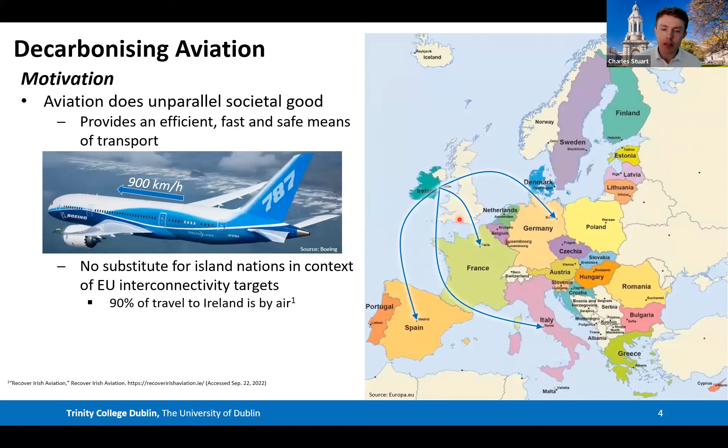The other bit of context is that in Ireland we are an island nation, somewhat geographically divorced from the rest of Europe. Europe doesn't just have emissions targets, it also has quite stringent mobility targets, one of which says you should be able to move door to door anywhere in Europe within 4 hours. So for us, aviation is quite important - there aren't really many alternatives. That's borne out in the fact that 90% of travel to Ireland at the moment is already by air.

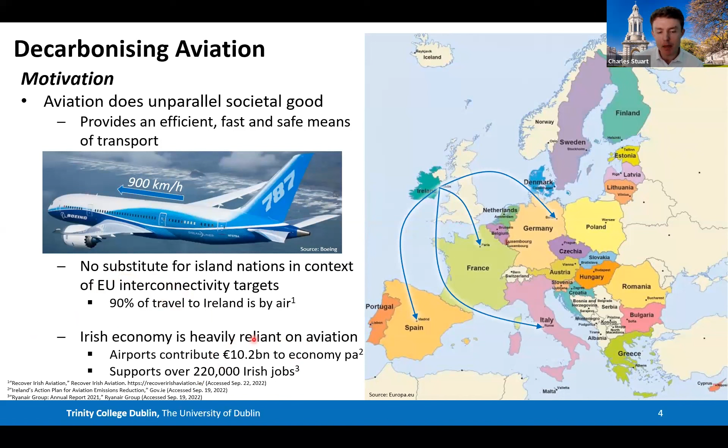The other thing to be aware of is that the Irish economy is very heavily reliant on aviation. There's about a €10 billion contribution to the Irish economy per annum from airports, and in and around 220,000 Irish jobs that hang upon a strong and sustainable aviation sector. So clearly aviation is very important for Ireland.

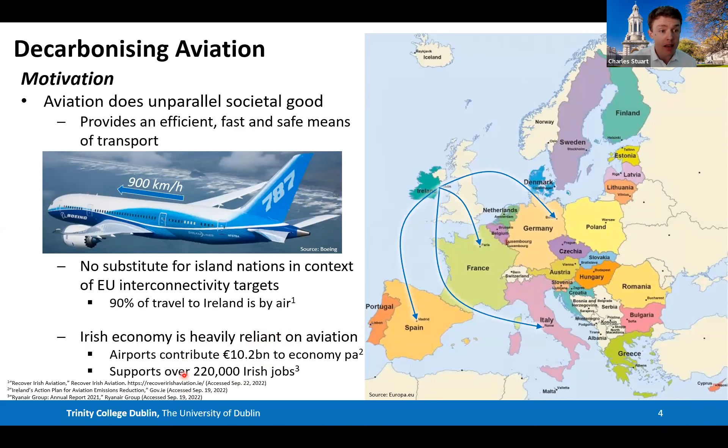The flip side of that coin is that Ireland is also very important for aviation. We punch well above our weight in terms of influence in the global aviation business. 14 out of the 15 largest aircraft leasing companies are based in the Republic of Ireland, and in total there's in and around €100 billion worth of assets - aircraft and engines - managed through Ireland.

The other bit of perspective is that Ireland is home to Europe's largest airline, Ryanair. And from a bit of a Trinity-centric viewpoint, the CEO of Ryanair, Michael O'Leary, is ex-Trinity. CEO of Qantas, Alan Joyce, ex-Trinity. And the ex-Director General of IATA, Willie Walsh, is ex-Trinity. So without revolving in these circles you may not be aware of it, but Ireland is a key player in the global aviation business.

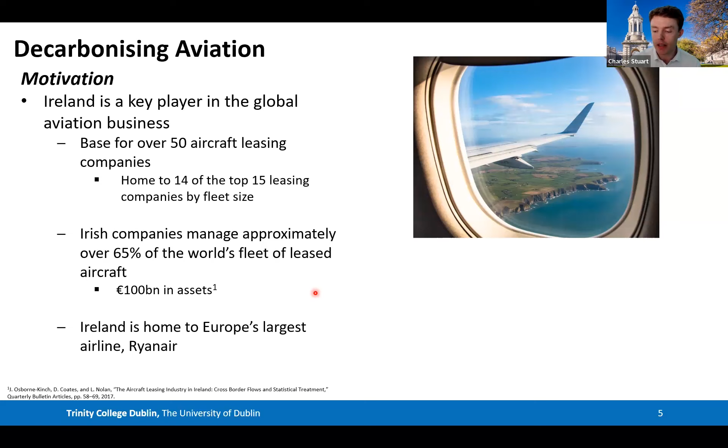What this all means is that as we stare down the barrel of quite a significant transition in the sector, it's clearly very important that Ireland has a strong voice within the European sustainable aviation community. Aviation in some ways is more important for us than any of the other European states. As we transition towards a low carbon future for aviation, it's very important that the technology agenda followed reflects Ireland's needs, and a lot of that comes down to the policy side as well.

Now the flip side of that coin is something we're all acutely aware of - the environmental impact of aviation can't be ignored. At the moment the global aviation sector contributes about 2 to 3%, depending on who you listen to, towards global CO2 emissions. The challenge is that even if nothing changed, that percentage would increase over time because other sectors are able to decarbonize more easily and are doing so more rapidly. This is a particular issue the aviation sector has to grapple with.

The source of these carbon emissions is that it's a sector almost entirely reliant upon fossil fuels. I'm not going to turn this into a combustion lecture, but this is a quick illustration of the reaction between octane, a reasonably good surrogate for Jet A1 or aircraft fuel, combusting alongside oxygen. If you've got carbon in the fuel, you're going to have carbon dioxide in the exhaust gases - that's absolutely unavoidable. The conversion ratio is around 3.1 to 1, so we release 3.1 kilos of CO2 for every kilogram of jet fuel burned.

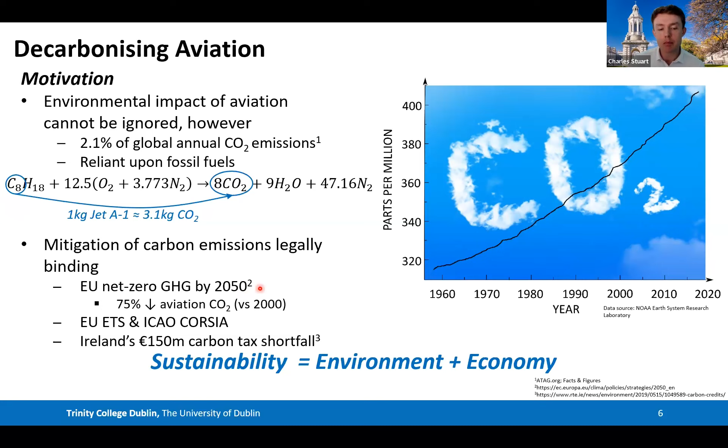What I've really been trying to communicate over the last couple of slides is that a truly sustainable solution for aviation is one where the environmental aspects are complied with and adhered to, but also the economy is allowed to prosper, so that the business side of aviation and all the positive aspects that it brings in terms of connectivity have to be maintained as well.

Now, in terms of the challenge then, as John mentioned, we've had a little bit of a perspective before on the road transport sector, but just as an overarching message for transportation, there's going to be no single solution to replace hydrocarbon fuels across the board.

So I've illustrated here a graph which shows energy density per unit volume on the y-axis and energy density per unit mass, or specific energy, on the x-axis. You can see that our traditional hydrocarbon fuels are a very good compromise for both of these. They're energy dense, they're also very easy to store, they're liquids at room temperature and pressure, and all things considered, they are remarkably inexpensive.

When you take the process of building an oil rig, floating it out into the ocean somewhere, drilling a few holes, you eventually hit oil, bringing the oil on board the rig, pumping it on shore, processing it, refining it, distributing it, putting it out to filling stations for the automotive case - that's all done for somewhere in the region of €1.60 a litre, and half of that's tax. So it's truly remarkable how inexpensive these are.

Another little bit of context is that we rely on carbon-based fuels. So cell respiration, which keeps us all going, uses glucose, which is a hydrocarbon effectively with a little bit of oxygen tacked onto the end. So it's a sugar.

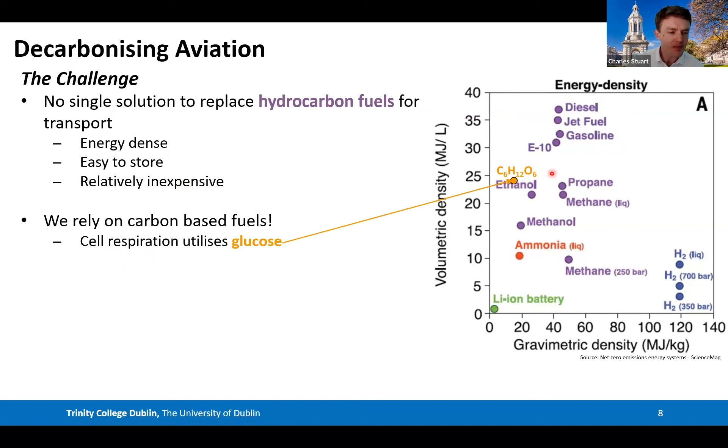And when we're talking about aviation, it's worth being aware that fat is a remarkable energy storage medium, and it's very, very close to jet fuel. That's no coincidence. If you look at some of the great migratory birds, such as the Arctic tern shown here, they can cover about 22,000 kilometers in 3 months. So what we ultimately see is that the aviation sector has converged on a fuel solution which is very similar to what millions of years of evolution have resulted in. That's just an illustration of how difficult it's going to be to move away from hydrocarbons in that context.

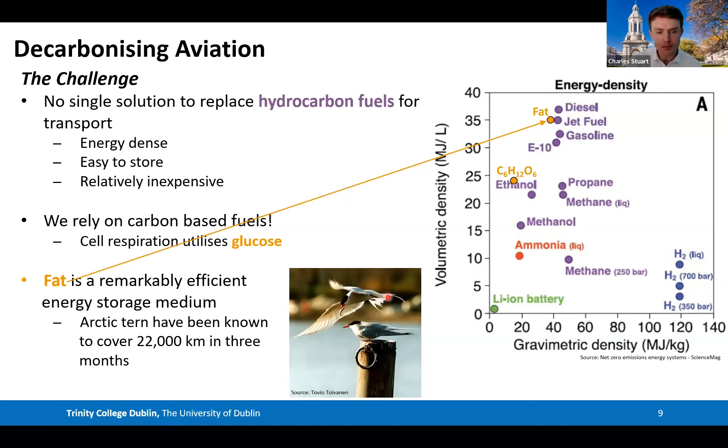Making it even more difficult is that aviation is going to be the most difficult sector of the lot, even within transport, to decarbonize in a 2050 timeframe. It is worth being aware that these are already very, very efficient machines.

If you look at the CO2 emissions per passenger kilometer for a Ryanair flight in 2021 and compare that to a typical internal combustion engine powered relatively small car, it's approaching half the CO2 emissions per passenger kilometer at typical utilization levels. And that's in spite of the fact that there's an order of magnitude difference in terms of the speed of travel.

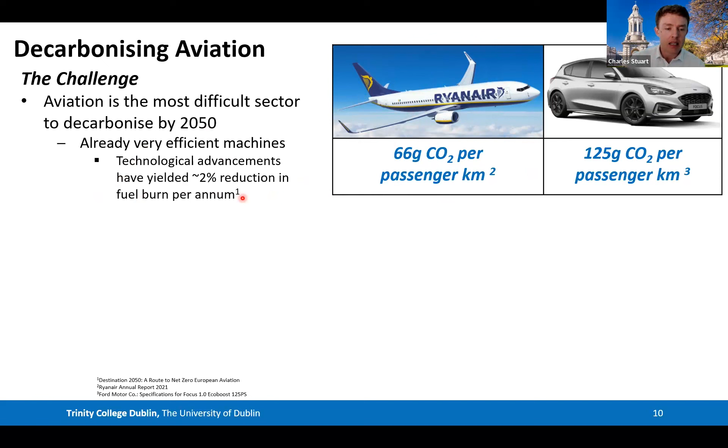The challenge is that those improvements have really been completely outpaced by sectoral growth, and taking the COVID dip out of the equation, all projections going forward show a significant growth in the sector. That means that these small incremental improvements are not going to be enough. There needs to be disruptive change, effectively, in order to successfully decarbonize aviation.

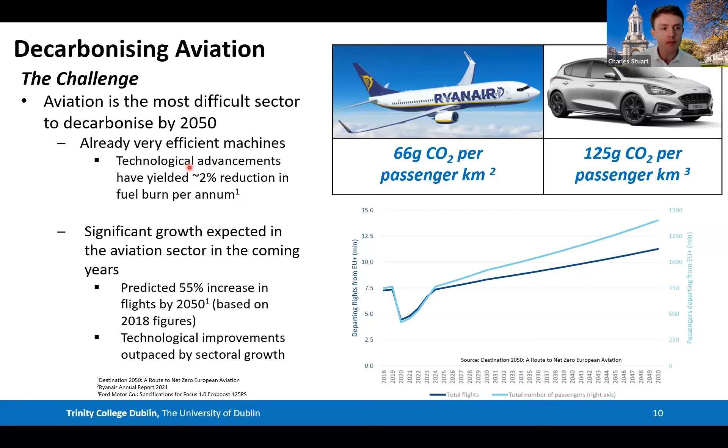The final thing to be aware of in terms of the challenge is that, even though batteries are gaining quite a bit of traction in the automotive sector, they're really simply not an option for commercial aviation as a primary source of propulsive power. At the theoretical limit for lithium-ion batteries, they're about 30 times less in specific energy, energy per unit mass, than kerosene or Jet A1.

What that means is that if you took a Boeing 747-8 Intercontinental, it has a maximum takeoff weight of around 448 tons. It can carry 470 passengers over 8,000 nautical miles, and that's all done with 178 tons of kerosene on board, held within wing-mounted tanks and a center body tank. If you wanted to replace that energy on board with lithium-ion batteries, the weight would balloon to over 5,300 tons, at which point you clearly do not have an aircraft anymore.

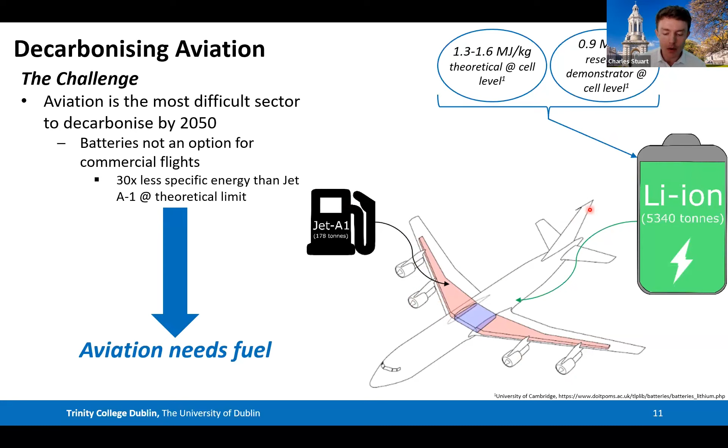So the overarching message is that aviation needs fuel. The question is which fuel can really deliver the reductions in carbon emissions that we need, and at the scale that we need.

There are a number of different fuel candidates. I'm just going to start with a brief overview of biofuels first of all. You may not be aware, but biofuels are already involved in our daily life. If you go to your local petrol station and fill up your car with either petrol or diesel, it's not completely petrol or diesel. The petrol will be between 5 and 10% ethanol, and the diesel will be up to 7%, usually derived from rapeseed oil, blended in with the fossil fuel.

There are a couple of different pathways for producing these fuels. There are first generation fuels which come from food crops like rapeseed. These achieve about a 20 to 50% reduction in net CO2 emissions. Of course, the way that happens is the crops use photosynthesis, which brings in carbon dioxide from the atmosphere and produces glucose that can then be processed afterwards. But because there are issues with land use change associated with these first generation fuels, we're not getting the benefit you might expect in terms of CO2 emission reduction.

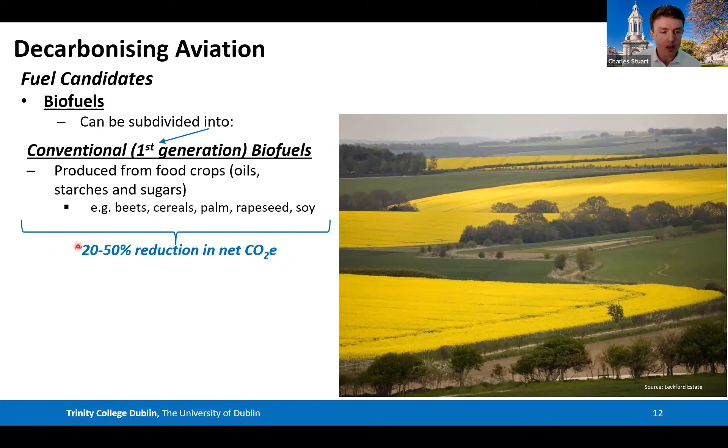That competition between food and fuel is a real issue, and it's something that the EU have set out to try and limit very stringently, and you can understand why. So they've introduced a cap in state aid and a cap in terms of the overall permissible amount of transport energy use that these first generation biofuels can contribute to.

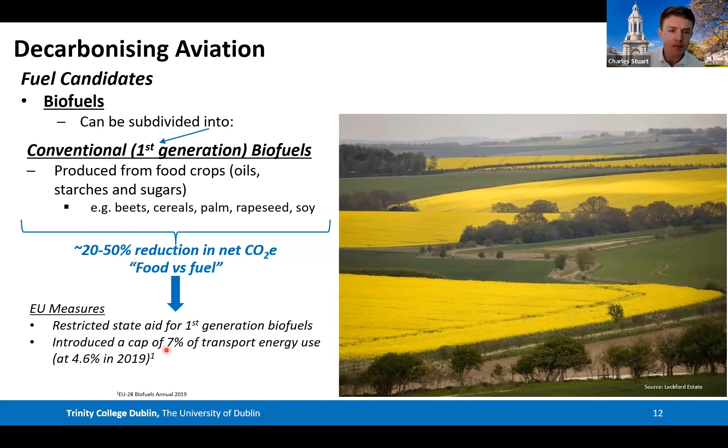The second option is to use effectively waste valorization of some shape or form. So rather than using direct crops, we use bio-waste or agricultural residues as the feedstock instead. Now these can potentially achieve up to, or sometimes greater than, 100% reduction in overall net CO2 once the fuel is combusted, particularly for these algal-based fuels, which are sometimes called third generation. The big problem they have though is cost and scale. At the moment they're produced in relatively small quantities and are quite expensive. Aviation in particular uses a lot of fuel. Even the road transport sector uses a lot of fuel, so scaling that up is an issue.

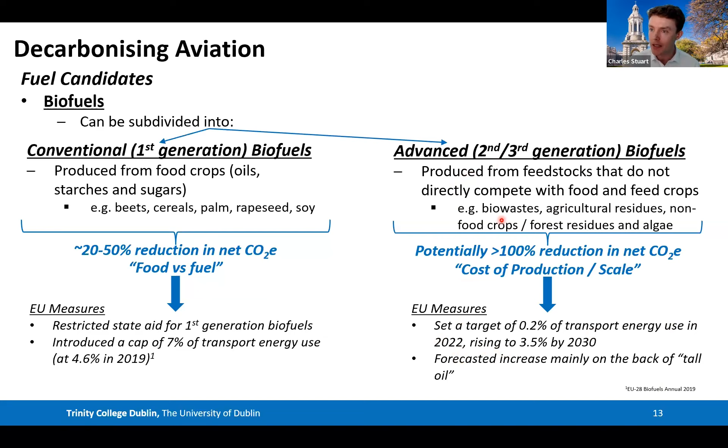The scaling is expected to come mainly on the basis of what's called tall oil, which comes from a pine wood pulping process. But what you actually see if you look at projections going forward is that the availability of these waste streams is not going to be any better in 2050 than it is today. The reason for that is actually a positive: we're getting better and better at reducing, reusing, and recycling, which means there's less by way of waste to use. That's a good thing, but it has the consequence that the scaling of these fuels is very much limited.

Just in terms of the aviation sector, at the moment sustainable aviation fuels, mostly from this biofuel pathway, represent less than 0.1% of total aviation fuel use within Europe. And the target is to get to 63% by 2050. So again, the scaling challenge here is quite remarkable.

The other thing to be aware of is that these fuels are not a drop-in replacement. At the moment, they're certified only to be blended up to 50% with existing fossil fuel. So that's another issue.

The final thing to be aware of is that specificity is key to figure out how much CO2 we're actually avoiding by using these fuels. Depending on where the feedstock is sourced from, and how it's transported to the point where the fuel is refined, that can all embed additional carbon which has to be accounted for. That's something colleagues in the School of Physics are working hard on, trying to do that carbon accounting effectively.

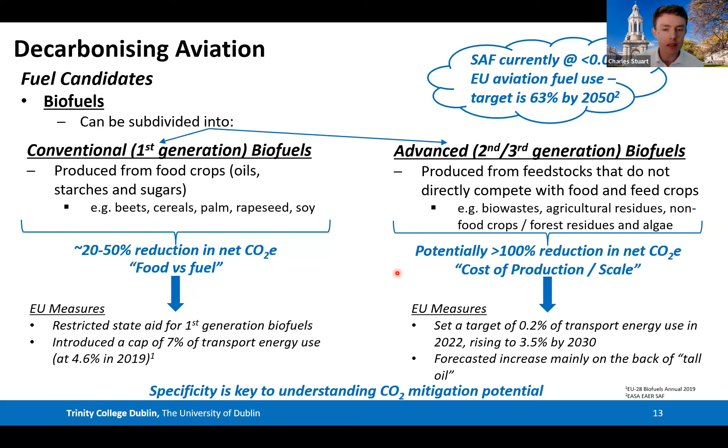The gold standard fuel candidate really is hydrogen, from the perspective of CO2 emissions anyway. It's a colorless, odorless gas at standard sea level conditions. The challenge is that at those conditions it has such a low energy density that it's completely impractical for transportation. You either need to pressurize it to maybe 350 times the pressure inside a car tire, or cool it to minus 253 degrees Celsius to produce a cryogenic liquid. Both of these processes take energy.

The great thing about hydrogen is that it produces no CO2 at the point of use. If you look at the reaction, hydrogen plus oxygen gives water as an output. So that all seems great, everything seems rosy when you look at it from that perspective. But this is a relatively blinkered view, one you hear a lot about in the news - this concept of tailpipe CO2. That's looking at emissions from the point the fuel is supplied to the vehicle to the point it's used - a tank-to-wake definition. Actually, the production and distribution of the fuel, this well-to-tank aspect, can have a significant impact, as you'll see.

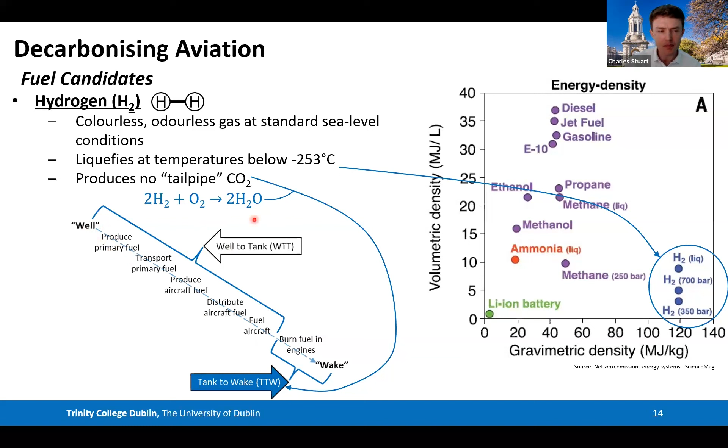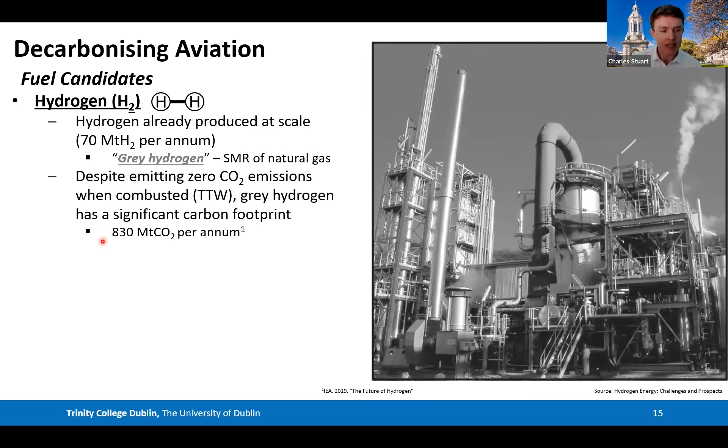You may think hydrogen is something way off, quite aspirational, not produced in any quantities at the moment. Well actually it is - there's already 70 million tons produced every year around the world. The vast majority is produced through what's called a grey hydrogen pathway, using steam methane reformation of natural gas. So even though the hydrogen produced this way produces no CO2 at the point of combustion, the production process, using natural gas as feedstock and fuel, produces a lot of carbon dioxide - about 830 million tons per year. It's difficult to visualize, but that's equal to the combined emissions of Indonesia and the UK for a year. So it's highly polluting from a CO2 perspective, even though the end result is not.

It's worth noting that this hydrogen is used mostly for industrial processes like steel and fertilizer production, so any of it produced tends to get used on site. There's no real distribution infrastructure for it.

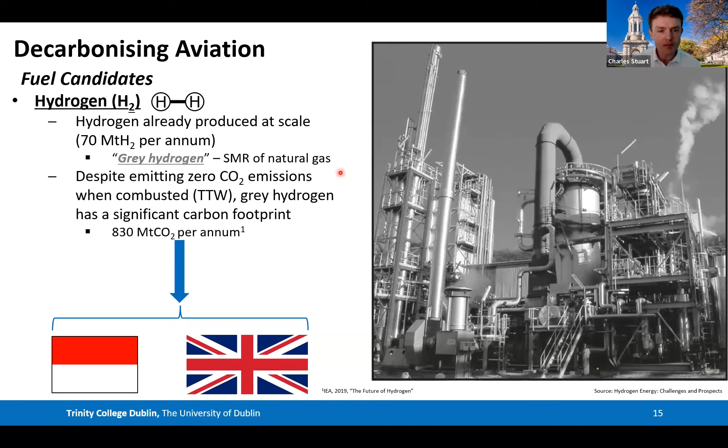What we clearly need is to scale the production of green hydrogen. It has the benefit of having no CO2 emissions on the entire well-to-wake basis - the full process from producing the fuel to the end point at which it's used. This uses renewable electricity to split water into its constituent parts. The issue is that it's very small in terms of its proportion of hydrogen production in the world at the moment - only about 2%.

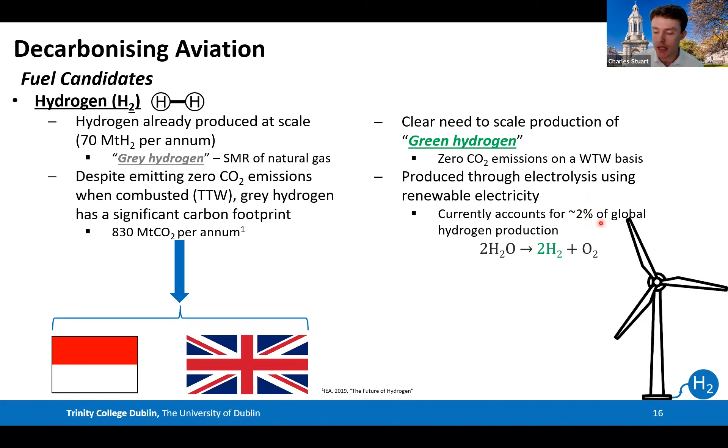The final fuel candidate is electro-fuels, or e-fuels. To reinforce the point again, the big issue with biofuels is availability of the feedstock within Europe - there's just not enough of it, and it's not just aviation looking for it. Road transport and other sectors are also putting up a lot of demand, so on their own, biofuels are not going to be the solution in any way, shape, or form. E-fuels are a little different - they take the bio-based feedstock out of the equation, using fresh water, renewable electricity, and CO2. So it effectively takes green hydrogen and combines it with carbon dioxide to create a liquid hydrocarbon.

The good thing about this is because you're building the fuel from the ground up, it can be a direct drop-in replacement for existing fuels like kerosene in the aviation sector. Actually, it's a bit of a designer fuel to some extent, because with that ground-up philosophy, you can change the chemistry and do some clever things to try to reduce toxic emissions, which is an important aspect.

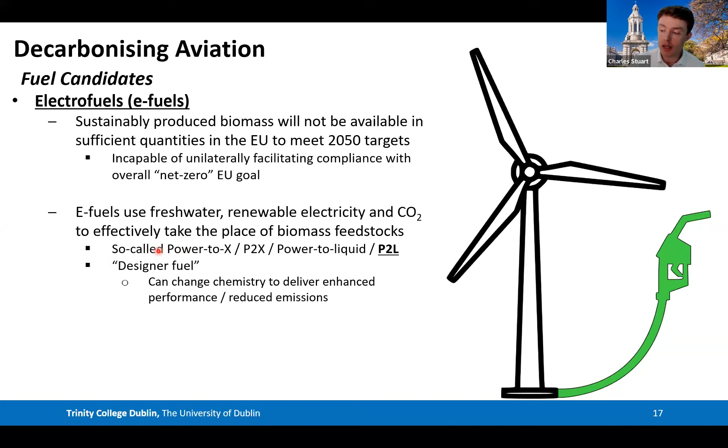The key thing to bear in mind is that this is a truly net zero carbon solution if we're using green hydrogen, produced using renewable electricity, and direct air capture for the carbon dioxide source. So any CO2 emitted at the point of combustion is fed back into the production of more fuel, essentially.

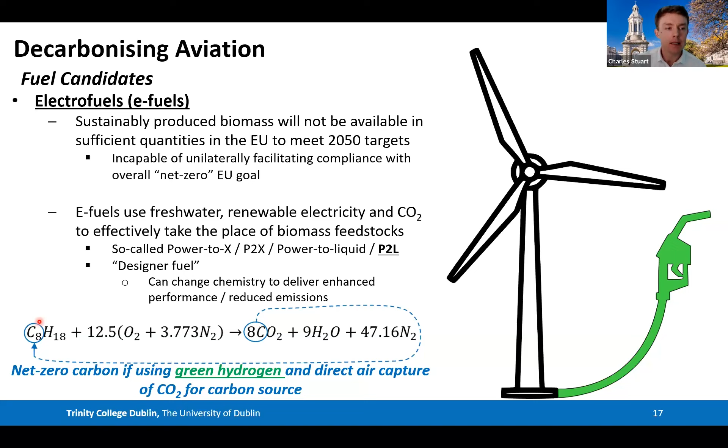Now, that's just looking at the fuels by themselves. There are other implications to consider whenever you actually want to roll them out at scale within the aviation sector. One of the big things to be aware of is that we can't wait until 2050 to make this happen. There's a bit of a phrase going around that 2030 is now. Well, 2050 is not very far away either.

Ultimately, we need to create impact very quickly. This contrasts against the fact that aviation is a high inertia industry. There's a lot of money involved, and safety is absolutely critical. There's no hard shoulder at 40,000 feet, so everything has to be right. So trying to develop a roadmap for how to roll these fuels out and scale them is of paramount importance.

Because of the issues discussed a moment ago, what we're focusing on is liquefied hydrogen and power-to-liquid sustainable aviation fuel. We're leaving biofuels out of the equation because they're fundamentally limited. Looking at the hydrogen case first, you take your renewable electricity, take some fresh water, pass both through an electrolyzer, and that produces hydrogen gas.

The hydrogen has to be liquefied to make it usable from an energy density perspective. That process means you need to put in about 1.73 megajoules of electricity for every megajoule of fuel you get out—a production efficiency of about 58%. The energy density of liquefied hydrogen is only about a quarter of kerosene or Jet A-1, so that's a bit of a limitation.

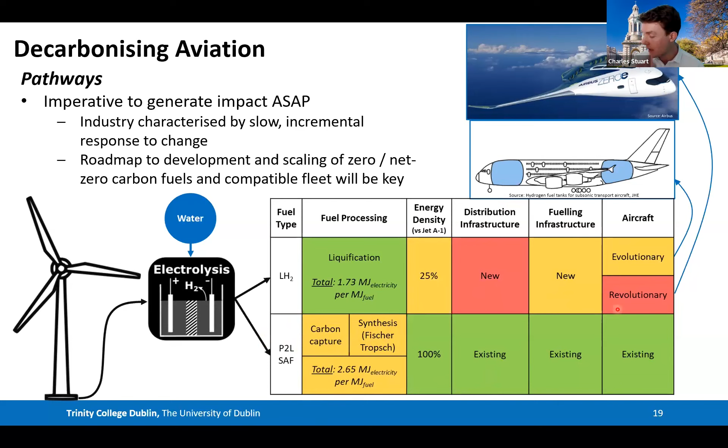So you could be forgiven for thinking, based on that previous slide, it's a clear victory for power-to-liquid sustainable aviation fuel. Where's the contest? Actually, grid capacity—renewable electricity—becomes the limiting factor.

Ireland's largest offshore wind farm at the moment is based at Arklow Bank, and you would need to run that wind farm for 25 hours flat out at rated capacity to fill one Boeing 737. Ryanair has the guts of 500 of these aircraft. So you can start to see where the scaling issue becomes a problem.

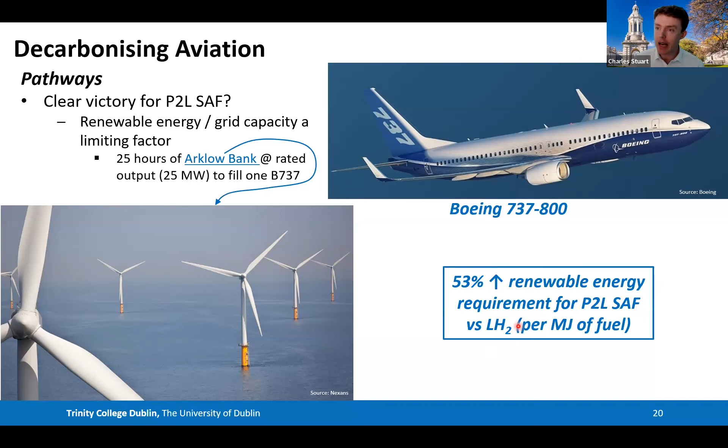Even though it's convenient, it takes 53% more renewable energy to produce power-to-liquid sustainable aviation fuel than it does to produce liquefied hydrogen. So again, at scale, that's quite a disparity and something to be aware of.

The other limitation of hydrogen is that it's about a quarter of the energy density of kerosene. But what we see in reality is that Boeing designed the 737 to do 2,900 nautical miles as a design mission, but Ryanair only fly about a quarter of that on their average mission. So by definition, half of their missions are less than that. All of a sudden, having a fuel which is 25% of the energy density of the existing fuel candidate may not be such a problem across the board.

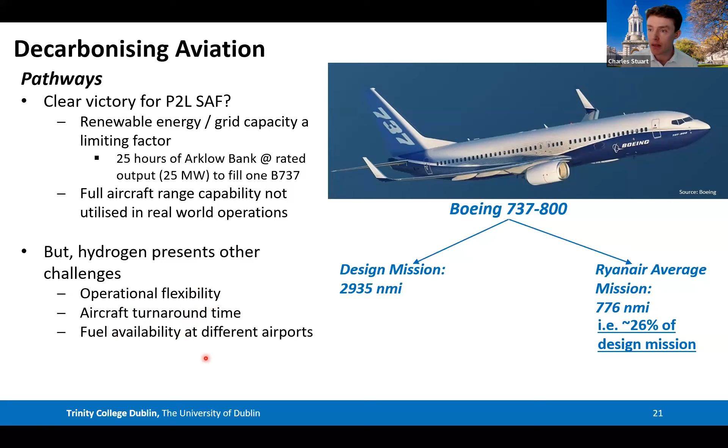Of course, to contrast that, hydrogen does present some other challenges. If you've got a fuel that's less energy dense, it means you have reduced operational flexibility. You can't, for example, fill the aircraft and do maybe 2 short haul runs before having to fill it again. With hydrogen, it would have to be filled possibly every time. Turnaround time can be an issue because we're dealing with the leakiest gas that is known, so processes and procedures for filling are likely to be more time consuming. And even if we roll out hydrogen at scale, we don't envision it will be available at every single airport in Europe, so that can affect the viability of different routes for such aircraft candidates.

And ultimately, this means there's no simple answer. What our work tries to look at is how real-world operations can enable the uptake of low-carbon technologies going forward, using comparisons such as these.

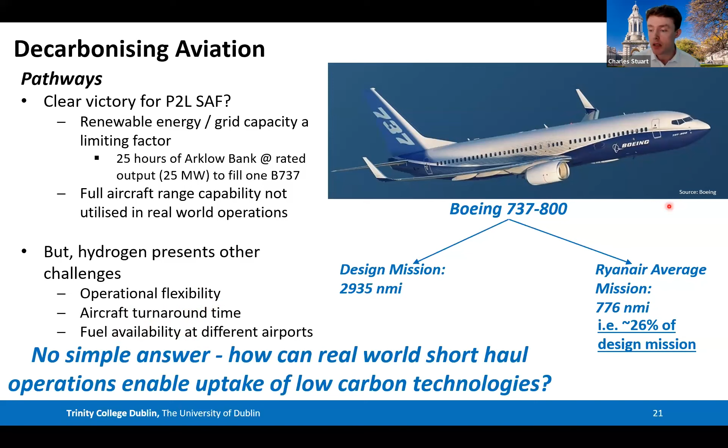I just want to make the point that not only is there no simple answer, there genuinely is no single answer either. This can sometimes descend into a bit of an argument about hydrogen versus SAF, and that does not do justice to the depth of the problem or the challenge. In reality, we're going to need to use all the levers available to us - liquid hydrogen plus SAF plus technology improvements to reduce the energy needed, plus carbon offsets - because this is not a single step change. It's a difficult journey with a number of distinct waypoints, but figuring out what those waypoints are is part of the challenge, because everyone needs to invest and engage in this. The aviation sector can't do it alone.

So this becomes a question of utilization. If you've got all these different levers, at what point do you pull them, and how do you optimally utilize each and every one of them at the different waypoints as we move towards 2050? It's a matter of trying to minimize the renewable energy demand, because that is significant, and maximize the amount of CO2 we can mitigate at each step towards 2050.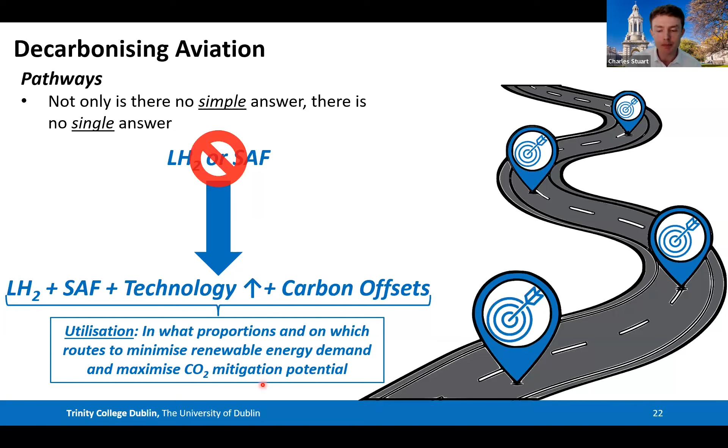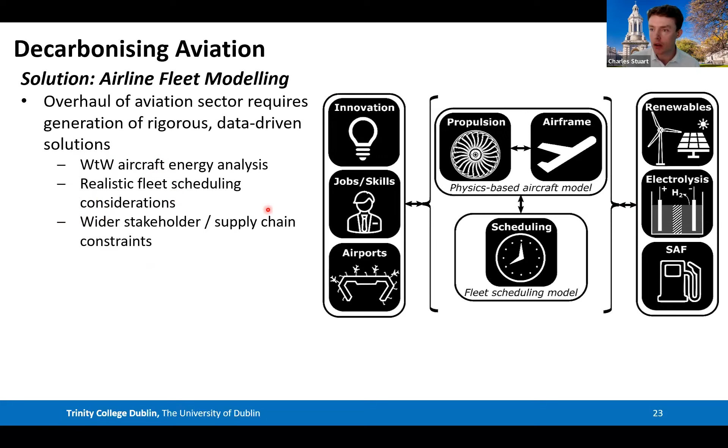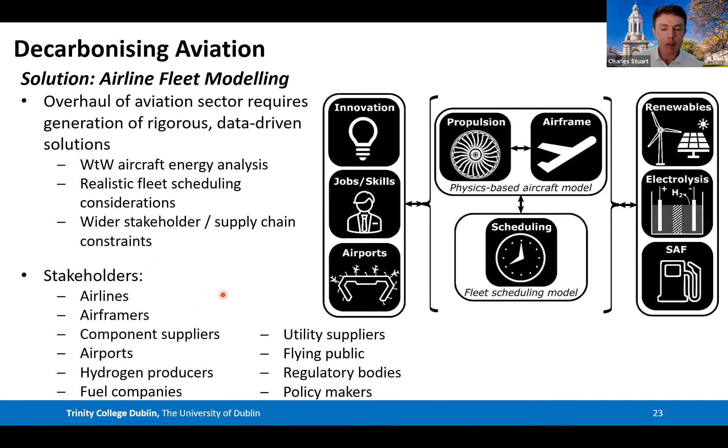So in terms of our solution, the basis of it is really to do detailed modeling to figure out exactly what is required to decarbonize aviation, first in an Irish context, and then extrapolating further. The fundamentals of this are a well-to-wake aircraft energy analysis to figure out what's needed in terms of the wider economy for infrastructure, power generation and hydrogen production. But one of the big aspects is engaging with stakeholders across the economy - that list is numerous and diverse. We essentially need to generate consensus and get everyone to agree on a path forward, so we're not creating suboptimal supply chains, and not having hydrogen aircraft before there's any hydrogen infrastructure to refuel them. It's making it all go, bit by bit, as far as possible.

So in terms of what this all means, at the core of it we're doing work on detailed physics-based aircraft modeling, for both current technology and future technology options, right out to a 2050 timeframe. One of the big advantages we have is real-world flight data through our partnership with Ryanair, which means the models can be validated and can be accurate. Because if you're a few percentage points out when modeling an individual aircraft candidate, by the time you scale that to an entire fleet, an entire country, the errors are huge. We're also taking into consideration airline scheduling constraints, because this is a high value business, and productivity matters in terms of the aircraft, so that features in as well.

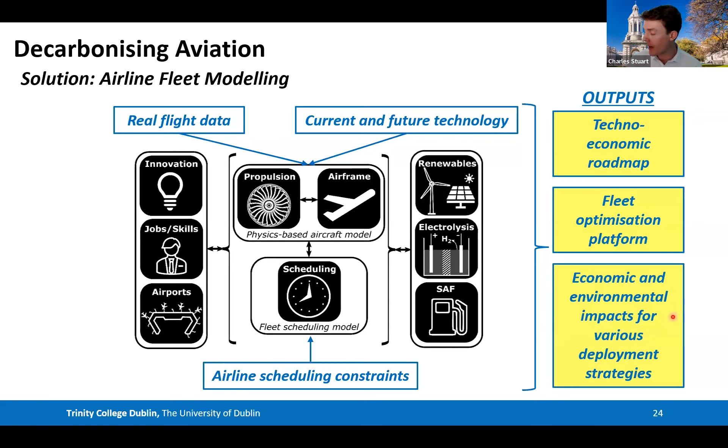And then, in terms of outputs, we're trying to figure out an overall techno-economic roadmap for the sector, and a fleet optimization platform, which again is a question of utilization as technology improves - how do we roll it out, and on which routes do we prioritize to generate maximum mitigation of CO2 emissions? As well as characterizing some of the wider benefits to society, we also aim to characterize the requirements in terms of infrastructure, and the general economic and environmental impacts for various different deployment strategies moving forward.